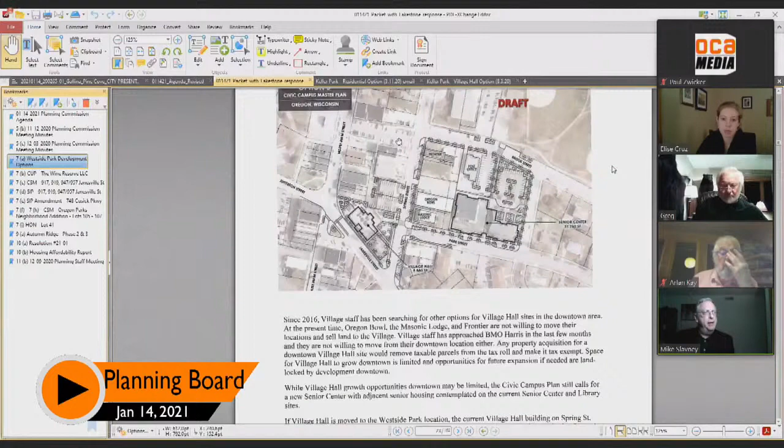Well, I can introduce this item. In the Plan Commission packet, which is page 24 of the PDF, Elise has provided our future land use map from the comprehensive plan.

This property, the northern two-thirds of it, is designated for park use. The southern third remains designated for institutional use because it reflects the potential use of that area for the school. As a reminder, depending on the outcome of this long process, we may need to amend the comprehensive plan's recommendation for this site, for example, to show it all as park as one alternative that we'll be talking about.

Jeff Maloney is the senior site designer for Vandewalle and Associates, and has laid out hundreds of sites around the country, focused here in southern Wisconsin. Jeff, I'll turn over the discussion of the alternatives to you.

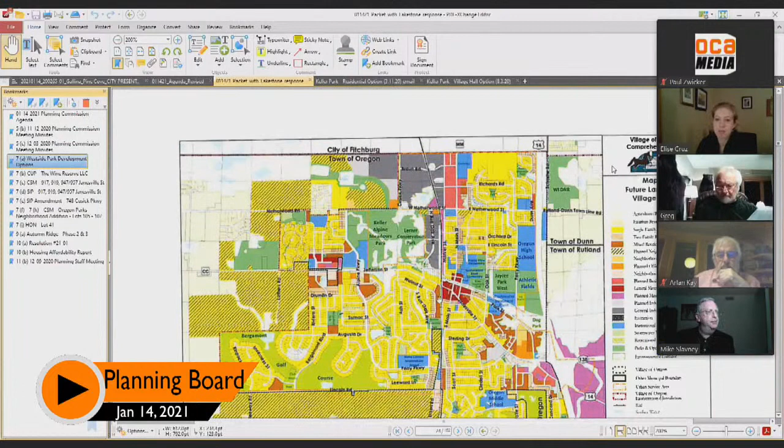Thanks, Mike and Elise. Hello, nice to see everyone. I guess there are little pictures in the bottom of my screen.

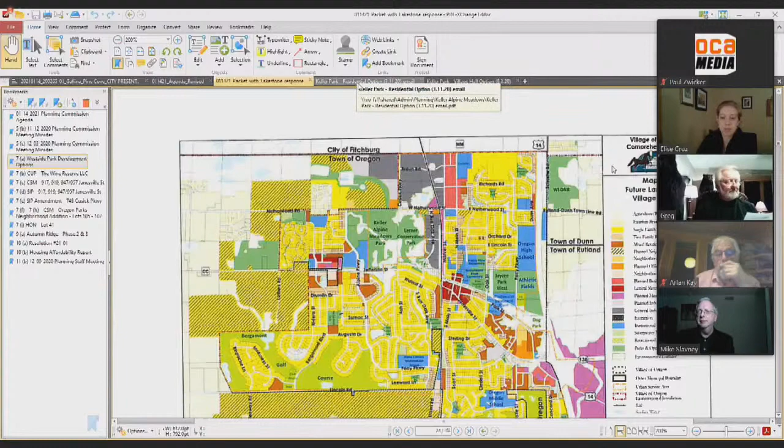We did prepare these two concepts back in March of 2020, right before everything shut down, so it's been a while since we did this. We worked with staff and rather quickly put these together to start the discussion and, as Elise mentioned, to just get people to think about what fits on the site.

They are pretty much interchangeable, so elements on there can be moved around, but it gives you a good idea what fits. In general, there's the east-west road, the existing road on the south. Where that enters the site into the parcel, we kept south of that as an opportunity for development, just like Mike was mentioning in the future land use map.

One alternative shows a village hall configuration, which we generally put some sizes to. The other shows some affordable housing or just housing in general. And the north shows some natural areas and some play fields. So this first option here, we can start with this one, Elise, that's fine.

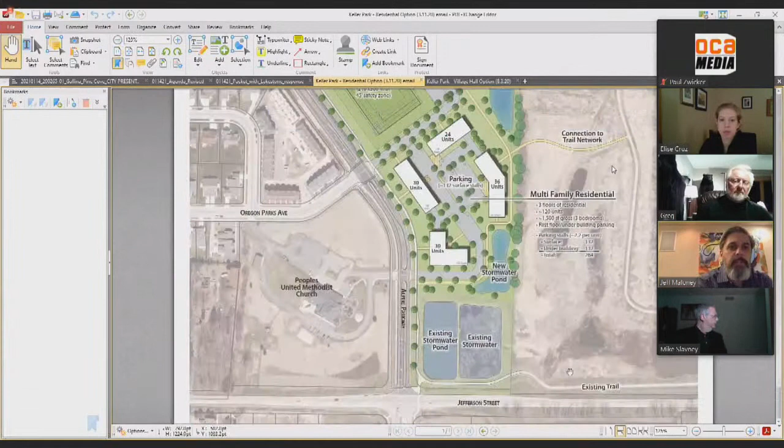If we zoom in on the south, we can see where that residential is. I'm sure you're all familiar with the area and the site itself, but as we walk through these concepts, just think about how the site generally falls from the west to the east. So we tried to use that existing topography as best we could in these concepts.

There's stormwater existing to the south, but we also added additional conceptual stormwater ponds along the south and the east to try to take any infiltration before it goes into more natural areas. So we want to respect the park, the natural area to the east.

So in this first concept, it just shows a multifamily layout. I think we have 120 units, so we didn't try to put very high density. We showed the setback from the street, similar to what's already built to the west.

Each building there you see is about 24 to 36 units. We used a gross square footage, if you're interested, of 1,500 square feet, which is a lot for a gross, but we wanted to accommodate 3 bedrooms or potential family housing. That's really what the direction we were given. So 120 units, you could fit more on there if we needed to, or less.

Stormwater pond to the south to collect the infiltration for that. There's plenty of parking in this concept for a 2-to-1 parking ratio, so 2 cars per unit over that.

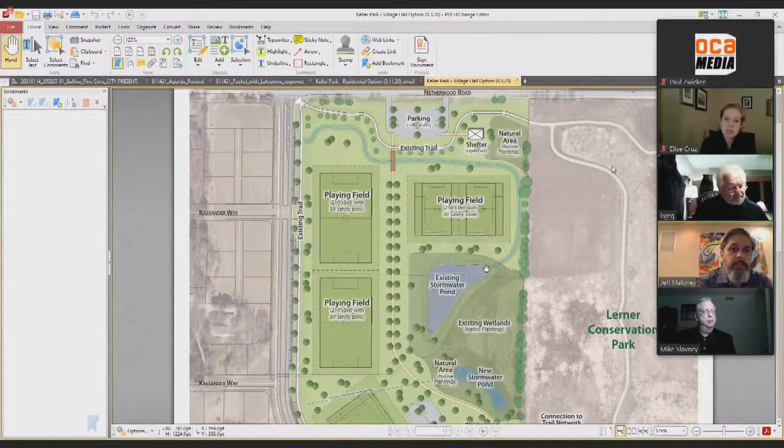That's existing, all that where the hand is, and then it is moved right there on the east side. We shifted it over a little bit to allow room for another play field if that's desired by the community. Otherwise, that wouldn't need the pipe that goes into the stormwater pond.

This option has a little bit more wetland area or natural area shown in concept. Obviously that shaded area could change depending on what you wanted for uses, but we had that path again designating more active space from the passive space. The play fields are essentially the same location, same size.

The parking lot on this option is a little smaller, though it could get bigger on the north side. And the playground, shelter, we showed a recreation area. Those are kind of sized for like tennis and pickleball and basketball to give you an idea what fits on the site.

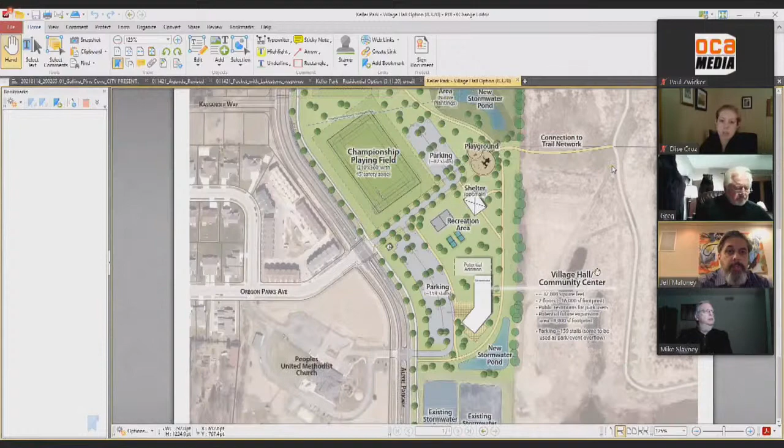And then the opportunity for the village hall, again we thought this could be a 2-story building, and typically we'd recommend putting buildings on the street, but with the natural area to the east and the sloping topography, we thought this could potentially be an exposed two-story structure. So it'd basically be one story looking east and 2 stories looking west.

This shows an 18,000 square foot footprint, so that's 37,000 square feet in total. And with an additional potential addition on the north side, 8,000 square feet shown in that rectangle, it could go larger.

We based that not on any needs assessment, but largely based on knowing that it could be a community center, could be different services besides just the village hall. So we wanted to make it larger.

And then also to give a real world example, Baraboo just redid their city hall a few years ago on the river. This is essentially the same size as that facility. Baraboo's is a little bit larger, it'd be the same size with the addition. And they have, I think, police and fire in that facility as well. So it's a large structure.

We thought there would be an opportunity, if this was a public building, to have public restrooms in here that people could use when they visit the park or the natural area.

And just to finish it off, there's shown about 140 parking stalls, so there's quite a few in that parking lot. And again, wanting to make sure we show areas for new stormwater infiltration before it goes east and before it goes south into the existing ponds.

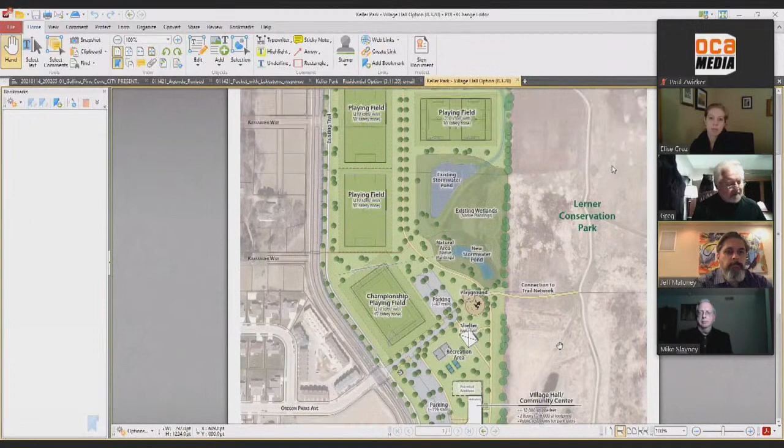Okay, thank you. Elise, do you want to say anything else, or Mike Slavney? Not at this time. All right, so Plan Commission members, anybody have any comments or questions?

Village Board, I got one. I'm sorry, go ahead, John.

You had mentioned that we'd gone through the Civic Campus study a few years ago and came up with sort of a wants and needs from the community, and wanted to sort of understand. We've got this study going on now, we had that study going on. Is there any work being done to sort of tie those things together? Because what we're talking about, or what we had talked about at the Civic Campus plan, was to sort of keep stuff downtown. And now the library has gone into a location that's not really downtown, it's a little bit off. And we've got a conceptual drawing that shows Village Hall even further away. Is there any thought as to sort of herd these cats a little bit and say, what do we want to do and how do we want to approach this thing? Is that making any sense?

Greg, can I address that? Certainly, absolutely. So John, we attempted over numerous years to try to find building sites for the senior center, the library, and the village hall downtown. We reached out to BMO Harris again, for like the second or third time, and we have just not been able to find the three sites for the buildings. And we just felt extending the village hall and that parking away, and some of the park away, and moving into a building that would be at capacity, we didn't think it made a lot of sense to put the village hall on Janesville Street. So we started looking for different sites, to be honest with you.

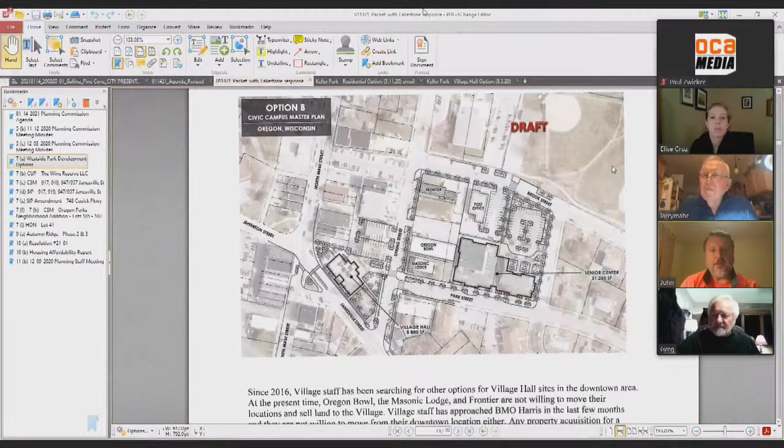Yes, my question is, was there a priority put on the senior center being downtown versus out here, coupling it with elderly housing versus moving Village Hall to that location? We're struggling with the library too. Is there any tie to keep it downtown in that location?

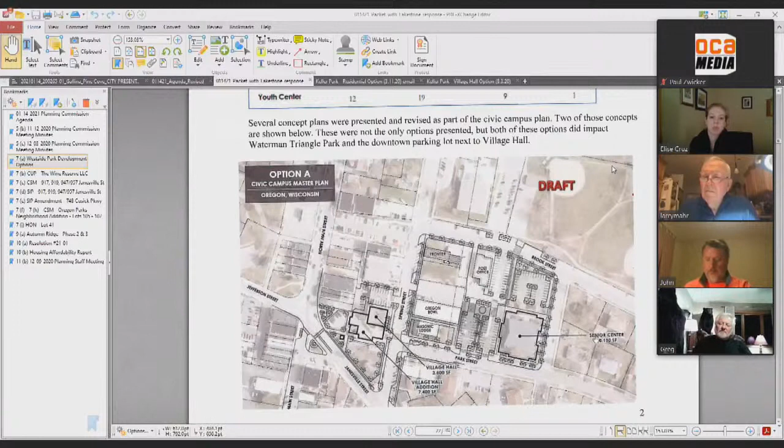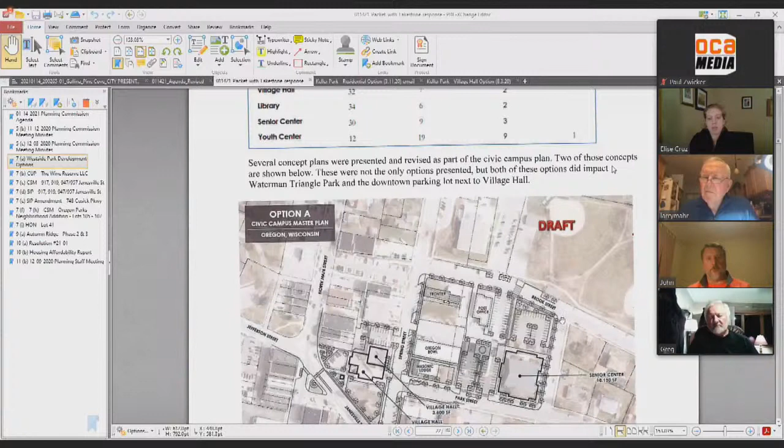That's a great question. When we were looking at the library site on North Main Street, we first thought that's where the senior center could go, since it would be a smaller building. But I've talked to Rachel, the senior center director, about this four, five, six times, and she feels strongly the senior center needs to remain on Park Street in its current location near this downtown senior housing. That's kind of why we're going with that approach. I'll say if COVID hadn't happened, we had intended to hire a consultant and architect in 2020 to look at that site, getting rid of the library and senior center building and putting up a new senior center. But Rachel feels pretty strongly that's where she wants the new senior center to go.

In the memo, you may have seen there was a Civic Campus Plan workshop done with 40 participants. I think it was largely downtown residents and business owners, maybe some board members as well. This is a little hard to read, but it does rank some of the facilities in terms of how people feel about things being downtown. This is also now four or five years old, so it would be interesting to see how opinions may have changed. The growth of the village has definitely been to the west, and that park is becoming a bit more of the geographic center of the village than it had been in the past.

Not to say it wouldn't be inconvenient for some people, but I agree with Mike. Also, we're trying to think about Village Hall as more than just Village Hall—maybe a community center with a room and kitchen that could be rented out for wedding receptions or high school graduation parties, allowing the village to expand as needed for staff. Realizing that other municipal buildings like the library and senior center will have a lot of community meeting space, the community room and boardroom in Village Hall that pre-COVID were used a lot by community groups—we'll still have some of those larger meeting areas downtown, regardless of where Village Hall ends up.

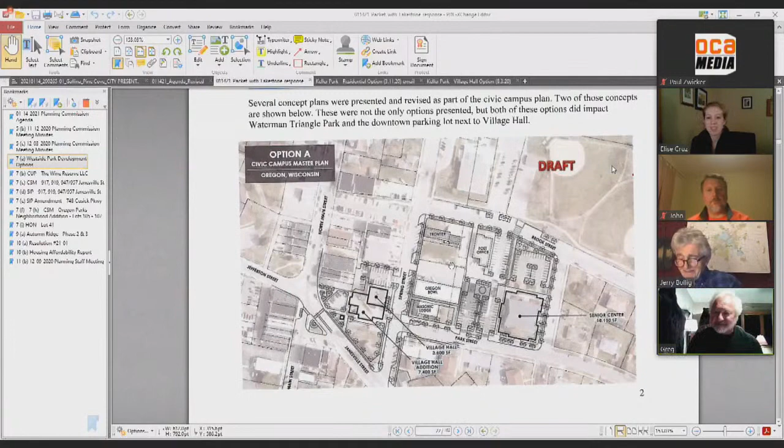Am I recognized? You are recognized, sir. Thank you, Chairman Snelly. During the overview, the consultant mentioned there's a place for the Village Hall comparable to the Baraboo Village Hall. How many square feet is that facility?

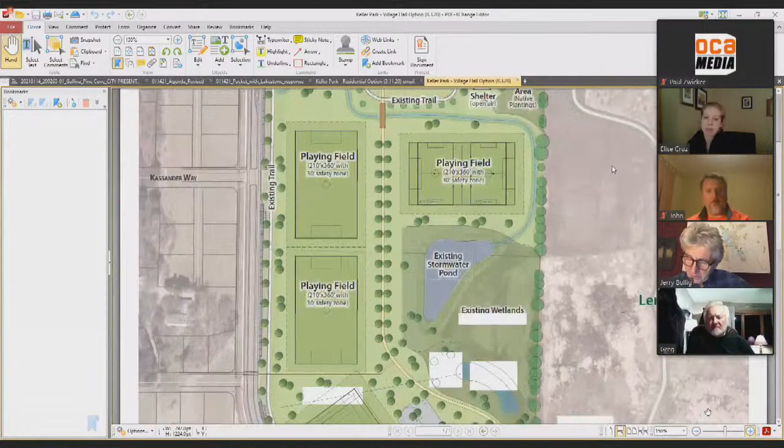The Baraboo is around 40 or so, at least in footprint. It's taller too, so that gives you an idea what fits on that.

Is there a possibility for restrooms on the north side of that lot, by the parking lot? Yes, there could be restrooms in that shelter or trailhead area. We have a porta potty located to the east and north, but if we're adding more recreational facilities, especially these playing fields, we need a modern, bigger restroom. Absolutely, Jerry, it's been on our plan all along that we'd need restrooms out at this site, possibly even one on the north and one on the south, depending on what's configured to the south.

And then how was the number of parking stalls determined?

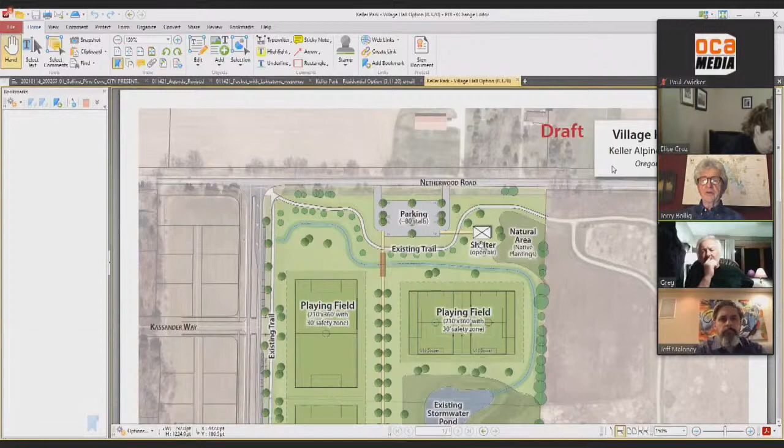We did have discussion with staff about parking, based on some events, and there's also parking along the street. We tried to break it up into two areas. I think we were trying to hit 200 for the park area plus street parking. And then for the village hall, we just fit what fit on the site.

So what population did you use on the field to determine 200 stalls? Trying to remember. We did have discussion at staff, but I can't remember how we got to that number.

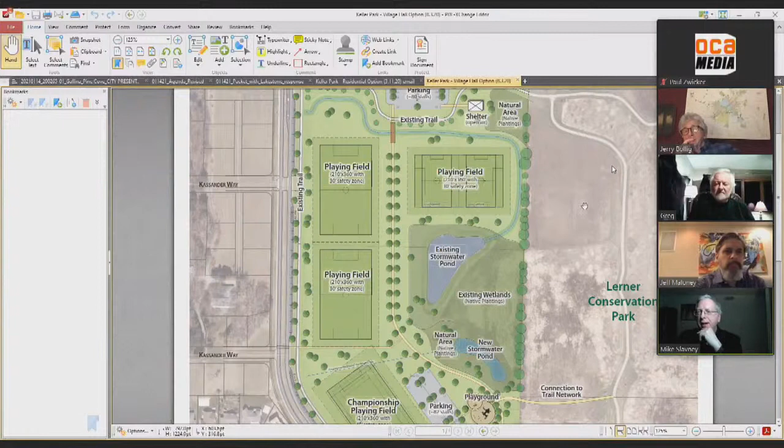Jeff, I think we felt that with players and relatives, hitting between 40 and 50 spaces per field would be more than adequate and would allow some of the unused spaces to be used for general park purposes. We've still got the conservation area and other park facilities in the area as well.

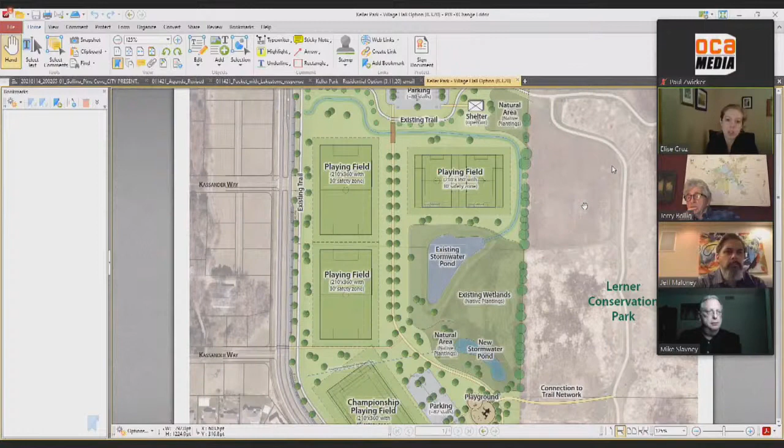Okay, thank you very much. I believe there's also overlap with games when they're back to back. You have two groups of people waiting — those currently using the field and those waiting to use it. So there is some overlap in how game days and tournaments work, and there'll also be spectators on nice summer nights. So those are my questions.

Thank you. Anybody else from Village Board? Ms. Nelson, you sent a letter to Mr. Rau. Did you want to have some discussion? Theresa? Yeah, thanks. Yep.

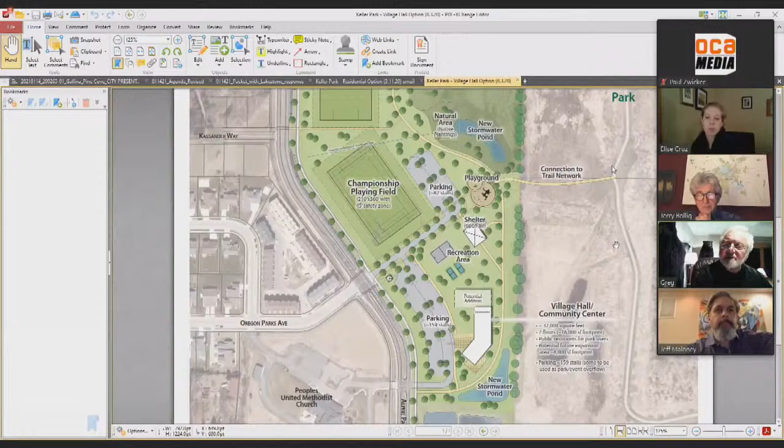I sent the letter to a number of board members and commission members, and I believe it's going to be part of the record for this meeting. So I don't want to rehash everything that's in the letter. I thought I would use this time tonight to keep it a little bit bigger picture.

I wanted to speak to you tonight to ask you to protect the Oregon Conservancy. Now, there is no Oregon Conservancy, but there should be. The areas of Keller Alpine Meadows Park, Lerner Conservation Park, Dega Memorial Park, DiMaggio Park, and the potential future Westside Park are a connected ecosystem of wetlands and uplands, whitetails and redtails, monarchs and moths. They deserve the recognition of the value they collectively provide our community.

Now, the village has many nice parks that provide spaces to play sports, play on a playground, or throw a Frisbee, but I think we have a really great opportunity here to foster something unique and special by choosing to restore instead of develop the Westside Park area. The village can make a commitment to environmental stewardship while reducing flooding, supporting pollinators, and preserving this natural retreat for park visitors. We have the opportunity to harness this potential, and it's just waiting for a coherent vision to transform this into a shining gem for our village.

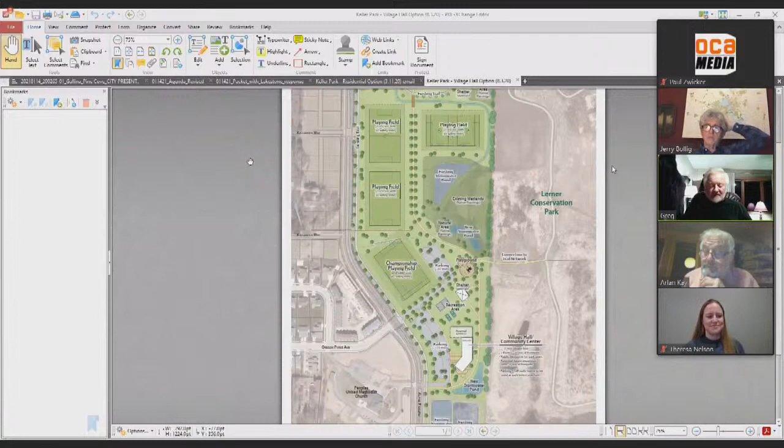Mr. Gracz, although you're a short timer, or Elise I guess, where does this thing going to go? We're going to look at this for the future. It's just something that's on the back burner, so to speak, or?

No, we noted on the agenda there's money in the 21 budget to hire a consultant to start continuing to work on this. And the new park board that the board just confirmed the other night will have their first meeting in March. So I would anticipate the new park board diving into this sometime in 21 with the consultant.

Okay, there's a lot I could say about how this park was formed after the 1999 flood, but I think that's left for a future meeting. As this proceeds along, there'll be plenty of public meetings, announcements, and you can look at the website for the village. All right, thank you very much, everybody, for participating.

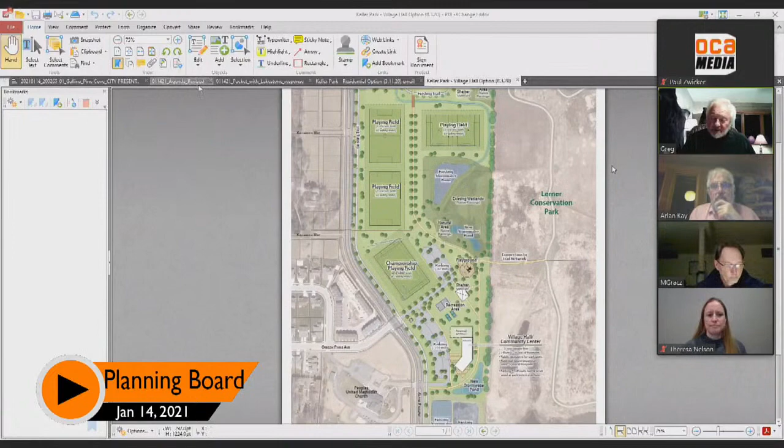Village board, are you going to leave us at this time? Or do you want to stay with us? I guess I have one more question if I could before you move on, Greg. I apologize.

Are you looking to get an expectation of a direction from the board and the plan commission on one of these two options, or is this just an informational thing? Just informational thing at this point. Thank you. Sure, John.

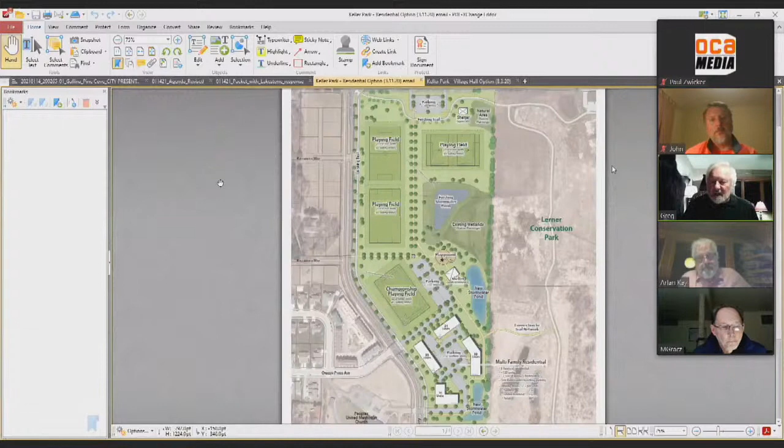All right, any other questions? Any comments from anybody? Mr. Chairman, if village board members stay, do we get the planning pay for the evening? Yes, you do. Okay, great, thank you. Thank you, Chair Schnelly. You're welcome, Trustee.

Well, okay, Jeannie, do you want to adjourn the meeting for the village board or not? Sure, Mike, is that appropriate? When we first prepared the agenda, we didn't have it on there. Then I realized I'm not sure the entire board wants to stay for the whole meeting. So you can certainly adjourn, and then board members can leave. Sure, yep, let's do that. We won't blame you.

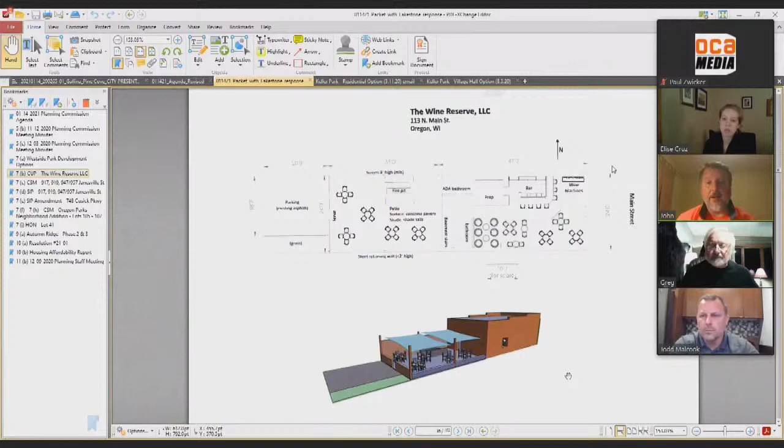I got a couple of questions. I think that this is a nice project, a nice use for the space, and I'm hopeful that you're successful. It's outside of our purview, but you might want to make sure that you are okay with your capacity for bathrooms with the number of people you're going to have in here. Based on what I'm looking at, it looks like you might be light, especially for ADA bathrooms. So just to let you know.

And the other thing is, the railing itself, what are you planning for the railing on the outdoor area in the back patio?

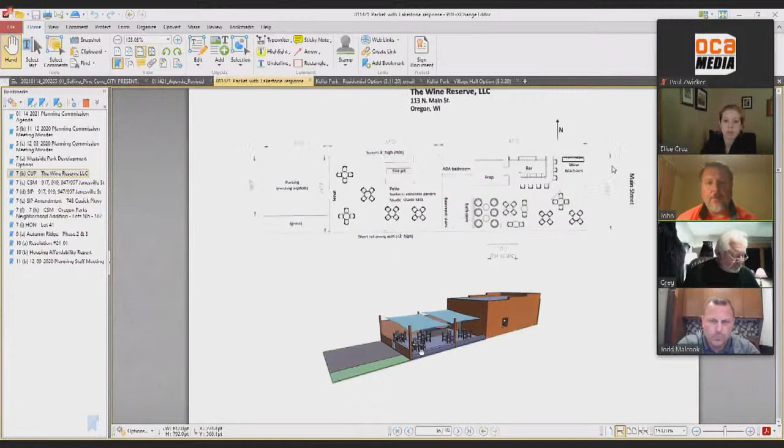We've actually been working with a landscape designer on what that's going to look like. Where the cursor is right now, there's actually a berm coming from the adjacent property, and so we're thinking that area would be like just a knee wall, retaining wall, that would hold the dirt and soil on the south, and then just a wall maybe at seat height along that side. Towards the back, we continue it around and have a gate in the center. On the north side, that's intended to be a privacy fence, because that's the side where we have the residents over there, so that was an accommodation for them.

So we'll need to make sure that you're going to be serving alcohol out there. Elise, is there any restrictions or requirements for a fence height or anything like that for serving of alcohol in an outdoor area?

Mike Slavney, I know we talked about this last week. There is a screening requirement. It's not necessarily about alcohol, but just about outdoor commercial entertainment in general. I believe Mike Slavney felt that the walls proposed were enough to contain the use, and the applicants are going to be at the village board meeting on Monday for their liquor license. So this will all be reviewed and hopefully approved as part of their premises description too.

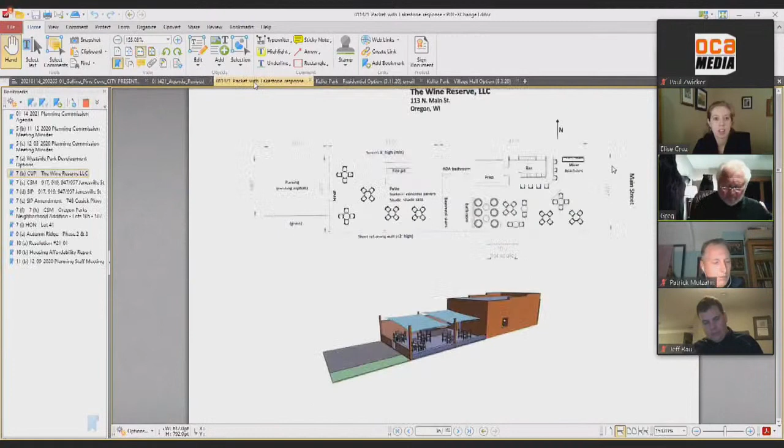All right, so this item is obviously closely tied to 7D, the SIP for Lakestone, but just as a separate approval. This CSM we've been anticipating. The property is currently made up of 3 different parcels, and the CSM proposes to rearrange them into 2 different parcels.

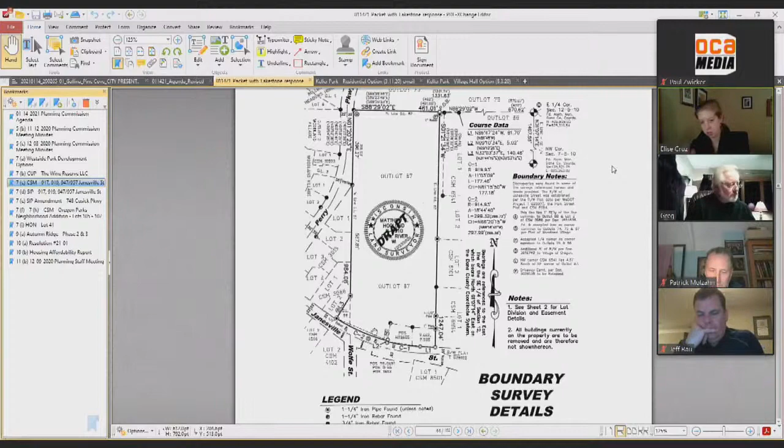As we've discussed before, the main access point for this site is going to be right at Wolfe Street and Janesville Street. That will be a four-way intersection. Obviously there's already stoplights there, so the stoplight in the south-facing direction will be added for people exiting the site for both the commercial and the residential use. The site will also have some cross easements that we're working on, and the applicant is working on, so that there's shared access to both the commercial site, whatever that may end up being developed as, and the residential site.

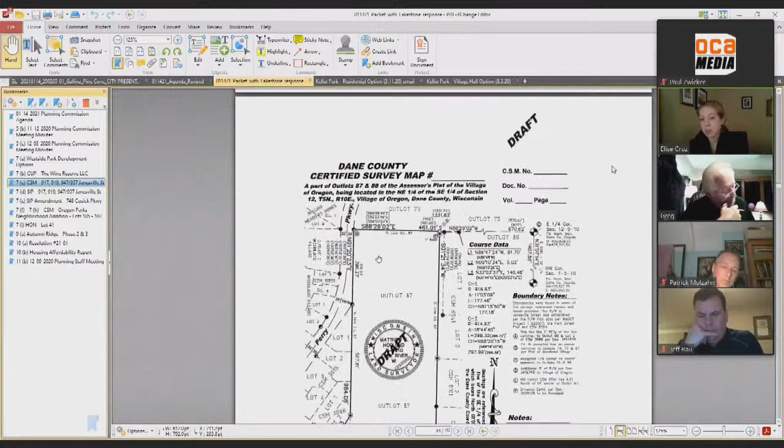There is an access point, if you may remember, off to Perry Parkway through the multifamily site. We do have a couple of comments from our village engineer that are still outstanding, pretty minor. So I want to make sure that before the final version is recorded at the county, we do get a final approval letter from our village engineer, and then we do receive those cross easements to ensure access to both lots. Obviously this will be tied to the SIP, so there's a condition of approval for the SIP that the CSM be approved, but this can certainly be done ahead of time. So that's kind of where the CSM stands.

I don't know if Jeff had any other comments or concerns that I didn't capture. I think that sums it up really well. All right, Jeff, Mr. Rau, do you have any? I'll start off first.

In the past there are a number of general comments from our village engineer, and they're... I shouldn't say minor, they're as a contractor, they're picky. Right, but we pay them to be picky. I understand that, so a retired contractor.

Are these substantial enough that there's any reason why we could not proceed with a certified survey map? No, there's nothing here that's overly concerning at all. And I think it's just cleanup stuff.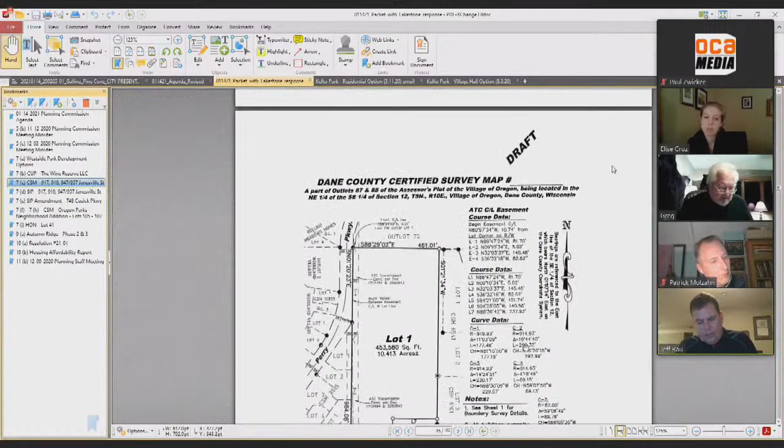So this CSM does a nice job. Keep in mind, there's several lots down on the southeast corner there that are kind of remnant homes and multifamily or a fourplex and that type of stuff, and this is going to clean that all up.

Plan Commission, anybody have any concerns? Any discussion, comments? None? Okay, then we need a motion to recommend the village board approve a certified survey map for 917, 919, 947, 957 Janesville Street, Lakestone Properties, with the recommendations forwarded by our village planning and zoning administrator.

So moved, Pino. Second, Mahr. Any discussion? All in favor say aye. Aye. Opposed? Motion carries. Thank you.

When do we, Elise, have any idea when we'd have that cleaned up? I guess that has to come with the applicant, they'll tell you. Right, likely in the next couple of weeks, and then I imagine we'd probably have the final version in front of the village board, hopefully in February. Let's see, we should shoot to have it cleaned up for that. All right, no problem, good, thank you.

Just a quick question. Okay, we'll move on to item 7D, which is discussion and possible recommendation of the village board, the SIP plan for the same property at Janesville Street from Lakestone Properties, affordable multifamily housing project.

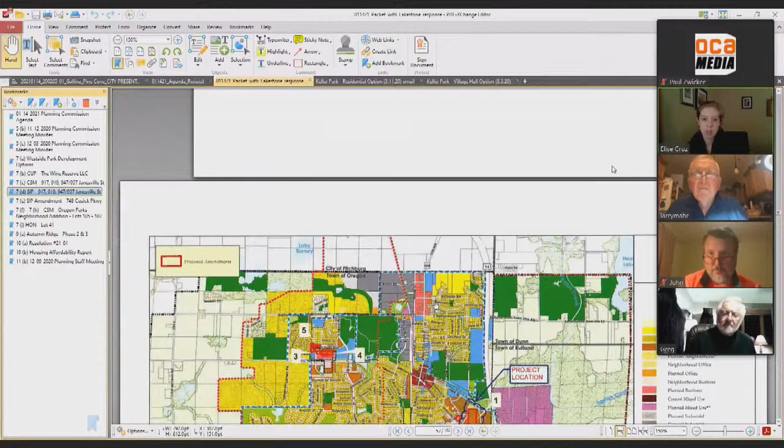This is just an overview - there are a couple pages of comments from the village engineer. Again, lots of small detail, picky type comments, but good catches by the village engineer. So I'll go ahead and scroll to the main map, but that concludes my comments.

Jeff Rau, do you have any comments at all? No, they're about where they need to be.

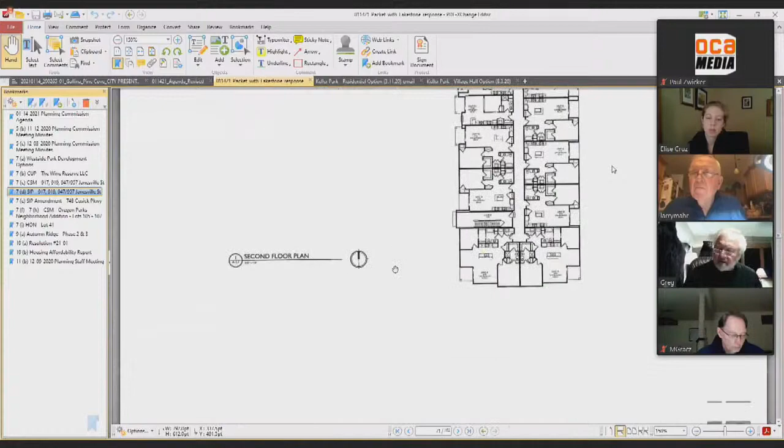Obviously we will still have final plan review when they complete all of the utilities and everything like that. We still have the easements to look at, to make sure the utilities are put in easements and everything exists with that. Most of the stuff is just making sure they comply with our standard details and standards for roadway connections and sidewalk connections and that type of thing.

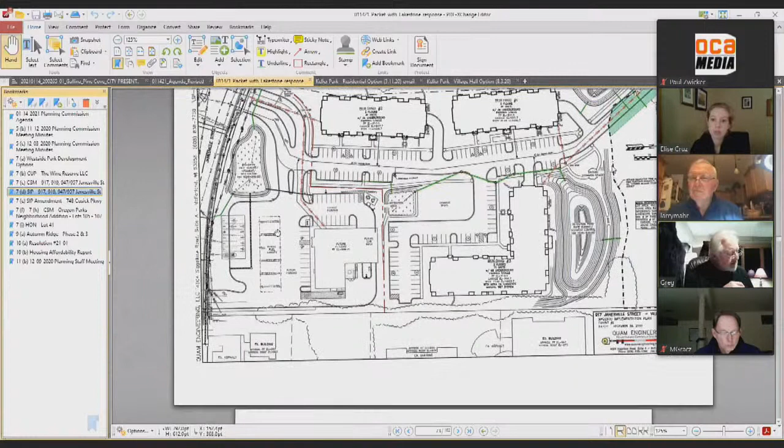I was going to maybe wait until later, until everybody finished discussing, as long as we're at this point - we've got sheets C2 through C4. There's a number of questions and clarifications they're asking for the village engineer.

Which one, Greg? I'm sorry, sheets. If you look on the second page, they've got drawing numbers C-2 through C-4. There's quite a list - right, yeah, which I think is kind of a lot, the best way to put it.

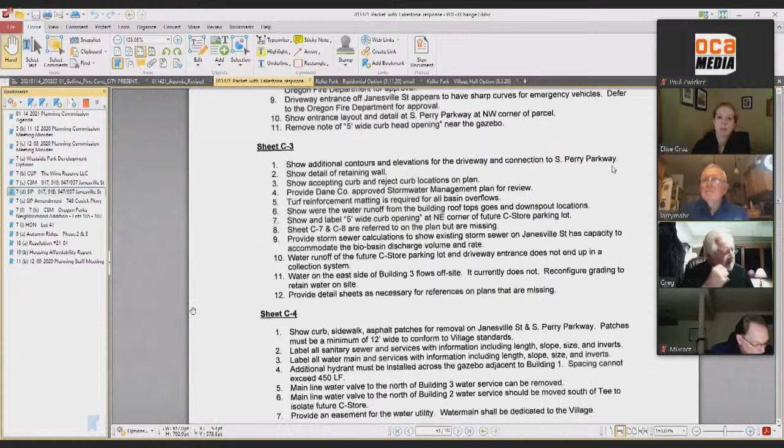It seems that we like to see sometimes fewer clarifications - excuse me, we like to see this kind of cleaned up. And I understand because of the timing, I get where we are with it right now. I'm not sure how much of a hurry the applicant is in, but under a specific implementation plan, I'd be looking at the comments here. Let's just pull out a few of these.

Show where existing traffic lights are to be relocated - they're still working on that final design. I would not expect that in an SIP.

Yellow truncated domes, those are a requirement. The radii in the drive lane should be a minimum of 26 feet for emergency vehicles. That's standard stuff that's going to come out and be required as part of a design anyways. This is always that tough thing - we ask our engineers to be very, very detailed.

And so they develop a list like this that looks like it's not ready. But a lot of these are very minor items that I'm happy they are picking up, because these are things that our engineers will make sure and go through in the final design that they accommodate, but they don't change the overall character or layout or implementation plan, if that's what we're using here, of the development.

I would also note that some of their comments are focused on that convenience store that's sort of sketched out as a conceptual, and just to remind the planning commission and those on the call, that's just sort of there as a placeholder. The applicants don't have a user for that site right now, but that was one potential development. They wanted to see how traffic would flow, how it might fit. So any comments about the parking lot, driveway entrance, that would all be reviewed with maybe a conditional use permit, but definitely a site plan when there's a specific user in place for that site. I think at this point, those houses would remain until there's a user for that commercial site.

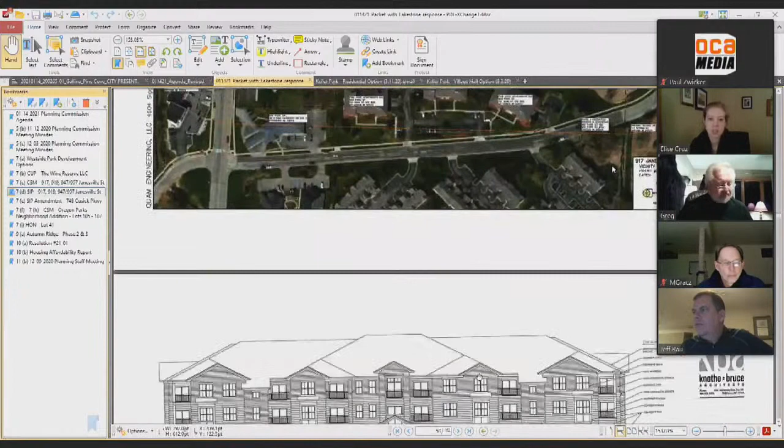Yeah, I think I agree with Elise and Jeff. There's a lot of these things on here. We met with our team to review the letter, and we can get our plans updated pretty quickly on that and turned around, probably within the next week or two. So nothing in there really surprised us or gave us concern. It's just a matter of getting the details finalized and finishing things up. Whether it's an approval with condition, I know we're going to review or listen to some other comments, and I can respond to those as well after. So we can follow up after that if you like.

Okay, Mr. Gallina, are you online? I am. All right. I suspect you want to have some comments. There might be somebody else in the audience, but you can go ahead with your comments, sir. All right. Thank you, Greg.

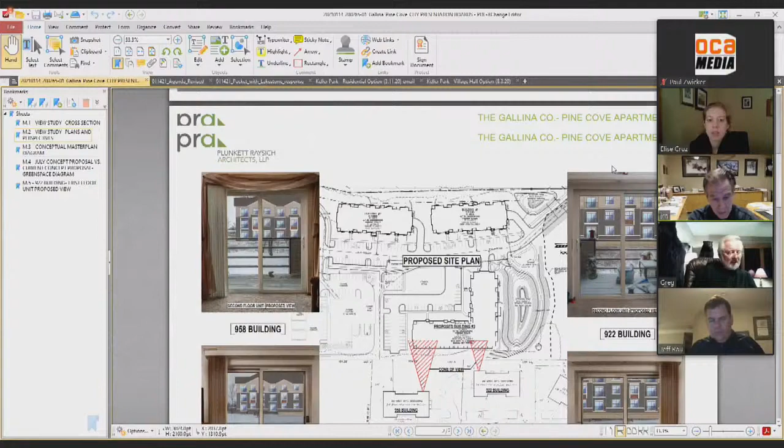Good evening. My name is Joe Gallina, and I'm the CEO and the owner of the Gallina Companies. I'm also the owner of Pine Cove Apartments. We're very thankful to have the opportunity to come before you tonight regarding Lakestone Properties SIP. Just a little background on the Gallina Companies: we specialize in developing and operating apartment communities. Over the last 40 years, we've constructed and operated over 3,400 apartments. Our apartment communities range in size from 75 units to 340 units, located in Wisconsin, Illinois, and Florida. In 1990, we developed Pine Cove Apartments, which is located immediately to the east of the Lakestone Properties parcel. We still own and operate Pine Cove Apartments today.

We carefully put our concerns in writing regarding the SIP that is before you tonight, which has a lot of information. Tonight, we primarily want to focus on the location of the Lakestone Properties Building Number 3, and what we believe is the negative impact it will have on both the Lakestone and the Pine Cove apartment communities. We're happy to answer any questions regarding our analysis of the SIP. At this time, I'll turn our presentation over to Kurt Keller of Plunkett Raysich Architects.

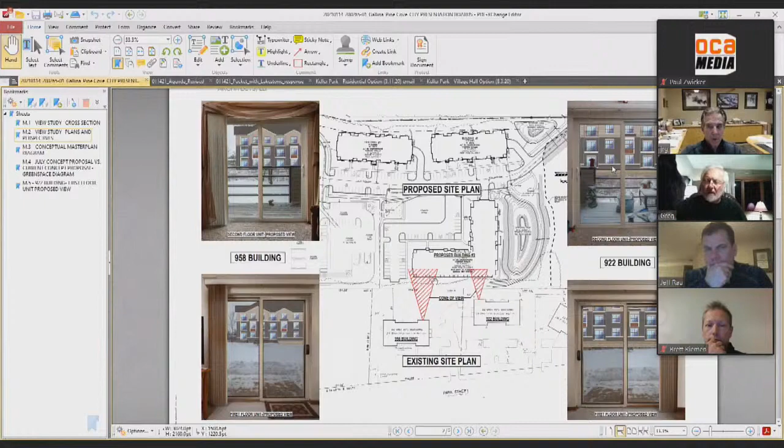An idea for your consideration, something that tries to balance the design, not trying to take over what is the requirement of the development team's architects and planners, but pointing out that there might be some different solutions here that could be looked at.

One is pulling back some size of building number 3. The distance we show between the 922 building and what's called building number 3 is about 84, 85 feet. So if you remember that last picture looking out of the 958, it's getting to be a reasonable distance, and you're not looking at the long facade of the building from neighbor to neighbor in that 60-foot range. You also have the potential here of a reference back to the International Fire Code, that there's potential for good circulation in a parking lot.

We're going to be talking in a minute about a green space, specifically play areas and things like that, and the continuity of green space and some changes that have occurred that affect it. This allows not only that there is a building separation, but there's also a green space separation that is usable green space.

This is a development that everything I'm looking at, it looks like it is meant for families. And there's still, even though the convenience store, gas station, and car wash are to the left, this design looks pretty well developed, because there's a very strong circulation and understanding of everything down to where the trash cans are going in the service aisles. It looks very developed and understood of what the intent is to be there.

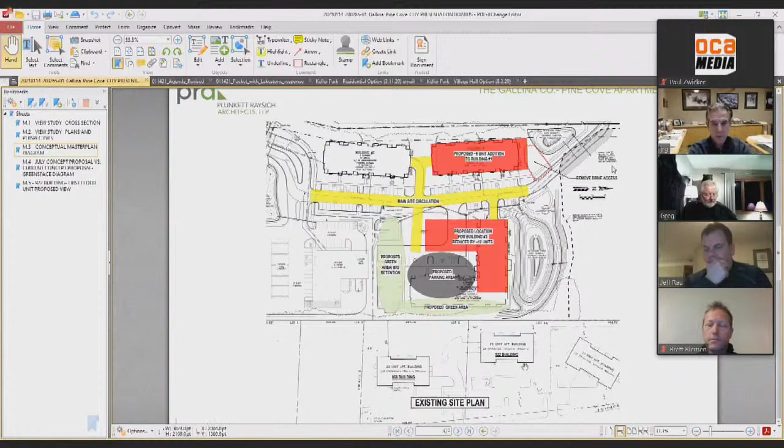Ms. Cruz, did you receive the later drawings that Mr. Gallina forwarded this afternoon? Yes, please, and thank you. I'm going to finish up here and turn back to Mr. Gallina, surrender the rest of the time to him. But I wanted to put up here, this was the image on the left, and we tried to get these fairly close to scale. They're not exact.

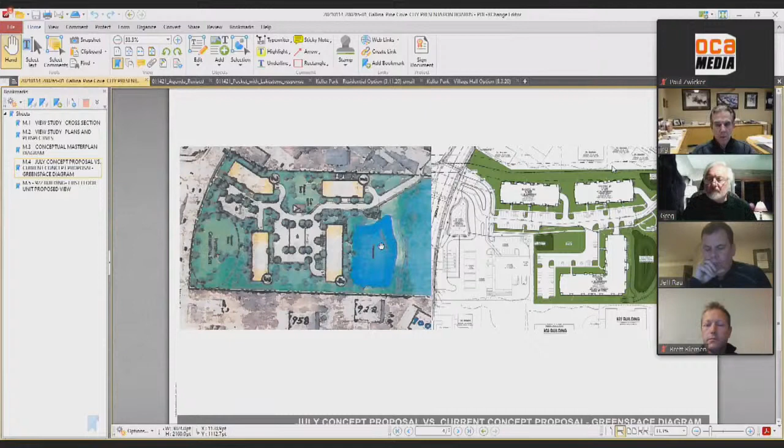So we also want to show just how the green space—we colored in some green space to how we understood it, and the darker green is meant to show the major areas of detention, the steeper parts of the slope. There are rock retaining walls and things that make it a bit of a challenge to walk around some of the buildings.

But you see that there's not a contiguous green space. There's an island in the middle, and it's really the only play area in the development. Children have to cross parking lots or roads—there's no other way to really access that area. It's a challenge, and it's very different from the design on the right. So with that green space discussion, I'm going to turn it back to Mr. Gallina and ask him for any final comments, and I'll certainly be available for any questions. Thank you very much.

Thanks, Kirk. I guess my comment is I've been developing and operating apartments for 40 years. We've probably developed over 45 different apartment communities, and our communities have been very successful for all the reasons Kirk just walked you through on the original concept. It gives you a reason to have longevity with the tenants that live there—the additional open space, the open green space, the usable green space.

I believe the July design had a clubhouse, an amenity center, a gazebo over potentially a pond, ample parking, a very comfortable area to walk through the community. You know, people move out of communities over time because they get tired of things. They get tired of fighting traffic, tired of trying to find a place to park, tired of not having privacy. As I said, we've developed many, many communities, and the concept plan in the July Observer, to me, would be a very, very successful apartment community, in my opinion.

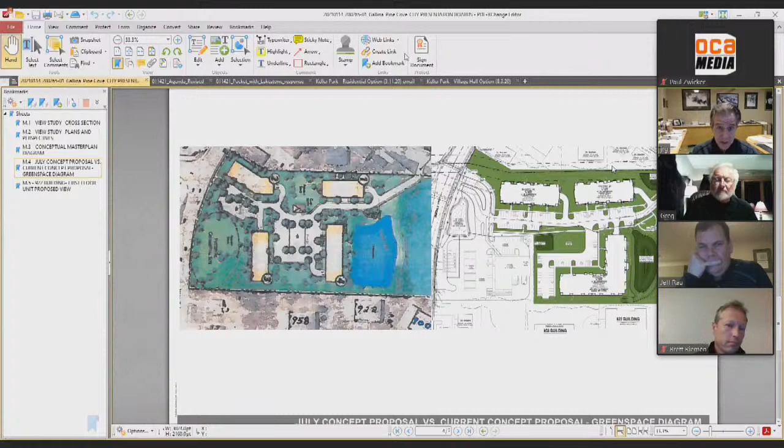It's going to create light pollution. You'll have shade during the day. And I just asked every board member, could you imagine this structure built in your backyard? Would this create privacy issues for you? And would you be comfortable living in your house with that in your backyard?

As Kurt mentioned earlier, this is a suburban location. Our customers at Pine Cove live at Pine Cove because it's a suburban location, not an urban location. And we believe the 60 feet is just way too close for this use. As I've mentioned in all my letters, we support the project. We just think the location of building 3 would not help both communities. And if it could be relocated, it would be a big improvement.

Thank you for hearing us. Thank you. Okay.

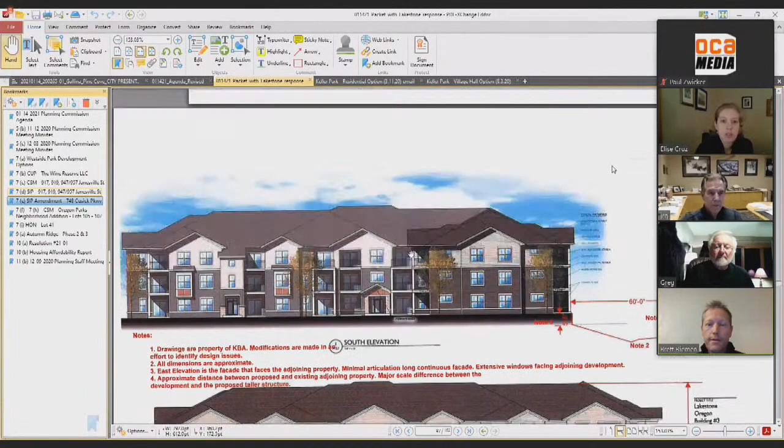Applicant, you have some comments back, don't you? Yeah, that'd be great. We appreciate the comments from Mr. Gallina and Mr. Keller on this. Obviously they've both been doing this for a long time, so we want to take that feedback in strong consideration. But there are also a lot of concerns we have with what they just said. I don't know if you want to go to the plan that they put together first.

Their alternative site plan. Yeah, that'd be good. Just the one they were working on. We'll get back to that here. The latest ones? Yeah, that one's good.

So we met with our team the other day once we saw this and wanted to provide some feedback. I'll get to the building 4 versus 3 issue, but we had lots of discussion with the Plan Commission and the Village Board about why the initial 4-building plan that was put together did not work. There were a number of reasons for that. I'd rather not go into that again.

So the changes they showed, flipping building 3 the way they did, causes some challenges on this development. I believe it isolates this building from the rest of the development. The way we had it, they're all opened up to each other, with the green space in the middle. Mr. Keller pointed out the green space was in a good spot. I think it's in a great spot in the center of the development.

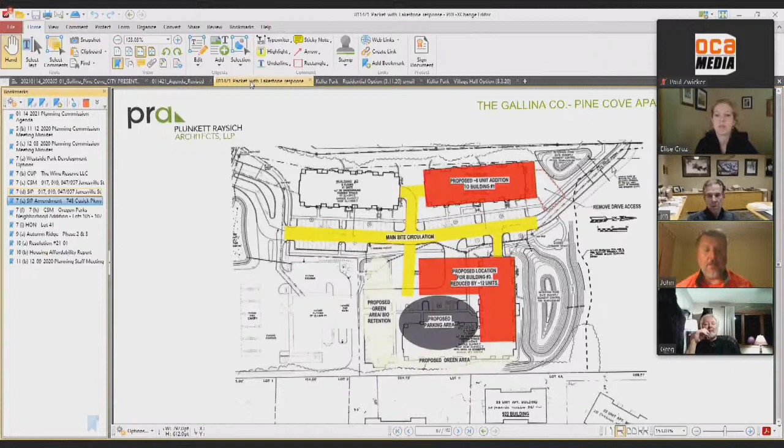As far as the concerns of Mr. Gallina and his architect, it seems the fire department access and those items are outside of what we typically look at. We leave that up to the fire department itself and the building inspection department. So while I appreciate their work, the building inspection and fire department have the ultimate call and can make flexibilities with that.

As far as the proximity to the other buildings, I just checked, and granted this is a small scale thing, but the Gallina companies' Pine Cove project has 2 buildings within almost 60 feet of each other. If you look at the corner of the close building to building 3, there's a building just to the right, and the corner of that building to this building is close to 60 feet itself.

And I wasn't too concerned about the proximity. I get worried when buildings are less than 10 feet apart, because in architecture terms that's sort of the magic number for opening requirements. So you're far enough distance away from the property line to give a suburban feel and provide enough openings and balconies for this apartment building.

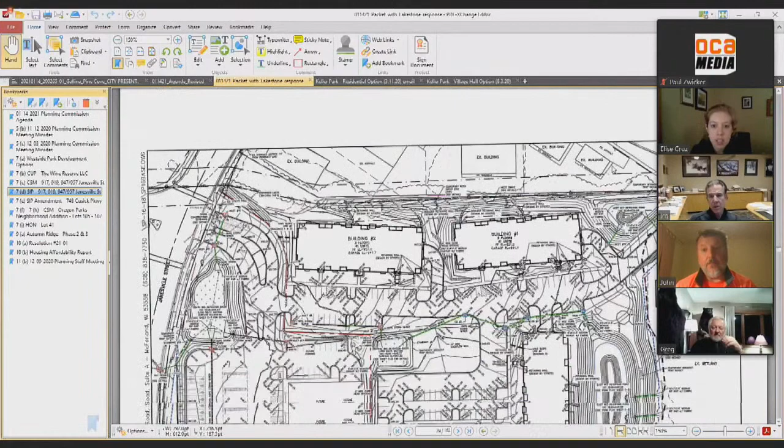Subjectively, if it's a concern, there are still about 30 feet on the Pine Cone lot for some landscaping to be installed. I'm sure we could ask Lakestone if they'd be interested in doing some additional landscaping on that side as well, to soften some of those walls. Looking at the landscaping plan, I think there's a couple of trees over there but there wasn't a whole lot, so maybe some of the trees along the drive aisle that goes through the property could be repositioned to help with that.

I am not comfortable with the gas station itself, and I know that it's not part of this development, so I am just washing that off. We've talked a couple of times about why the drive aisles can't be joined between 1 and 2, and it is what it is. That site falls off pretty hard on that side.

There's some good information in the presentation that was made. A lot of it, in my opinion, is just subjective. So I think we have a good quality project here, and is it perfect? No, but it is a good project and it meets a need that the village has, and I am in support of it.

Okay, thank you. Anybody else in Plan Commission? Can we respond to a comment? Am I able to respond to a comment? Absolutely.

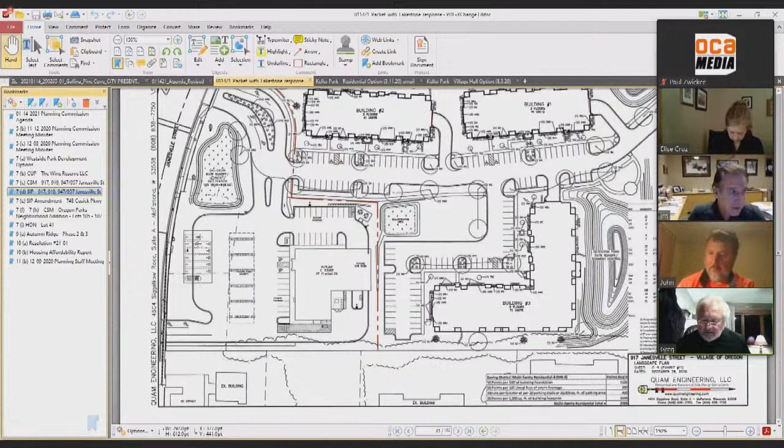I guess, I don't know John's last name, Mr. Bino, John Bino, the board member. When you look at our 922 building to the building to the north, you're looking at the end of the building, not the side of the building, so you're not looking at this big wide mass of a building, you're only looking at the end. And I think that makes a big difference when you look at 60 feet. In your opinion that is fair. If you turn building 3 so we're only looking at the end, that would work for us.

Mr. Gallina, could I please add on to your commentary? Sure, thank you. This is Kirk Keller again. If you could, Ms. Cruz, go back to the sketch idea that we put together, the one with the... thank you, that one.

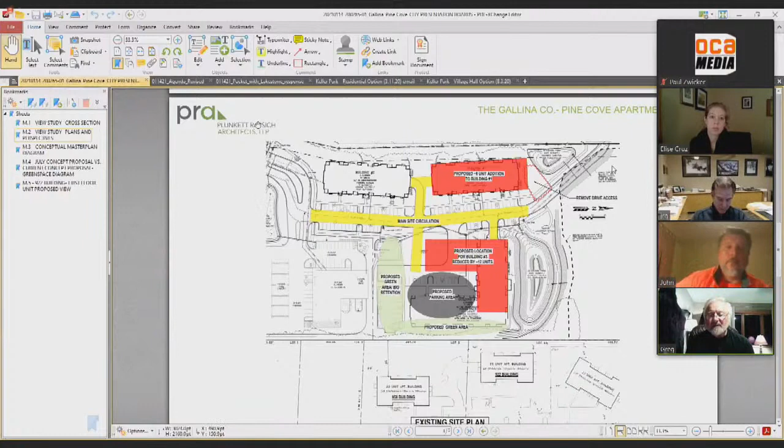Brett, do you have any other comments about it? No, I continue to think that, I appreciate their comments. I think moving it 10 feet, I'm fine with, of course, I'm fine with the 60 feet. I think the 60 feet is enough. I think it doesn't affect a lot of the building, but again, that's me, I haven't owned the building for 20 years. I understand that they don't want anything built there really. But even turning the building, then you'd be looking at a parking lot with a bunch of parking lights. So I don't know, it's not perfect, but I think this plan works well. If they want to take us up on the 10 feet, we're happy to do it. We lose some parking, but I think it's a very good faith effort to try to work this out.

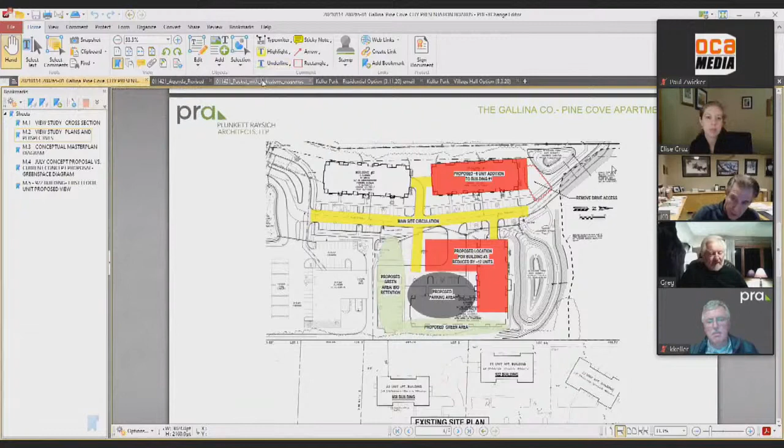Okay, so we've had both property owners discuss this. Anybody on plan commission, anybody else? Pat, do you have any comments? Larry? I do, but I saw Mike Slavney raising his hand, so... Oh, how did you see him raise his hand? Okay, Mike, did you want to make a comment, Mr. Slavney? I do.

I agree with Mr. Gallina and with Lakestone's comments. I think they're both right. To me, what was striking about the photos taken from the existing apartments was the lack of landscaping. And of course, there's no need to really landscape a vacant site. One thing that I think could be a very positive outcome, maybe the most positive outcome of sliding the building west 10 feet, is that it could provide a level platform for planting evergreens that'll grow big - hemlock, white pine, things with real mass and height to them. It's a long-term investment, but I think that would make a big difference. Having that extra 10 feet would allow some sort of interruption in the slope along the east side of building 3, at some point in that setback, to provide for a wider, flatter area so trees of that size could really get established over the long run. I just planted a couple hemlock in my yard, and I've got an existing one that's 60 years old, and a white pine that's 60 years old that was planted - they're park specimen trees. So I've seen what time can do, and within 3 or 4 years, they start really taking off vertically. So the best recommendation I could offer is getting more large-scale evergreen along the common lot line, at some point where it could be made flatter, and invest $4,000 or $5,000 in good quality trees and load up that area between the two buildings.

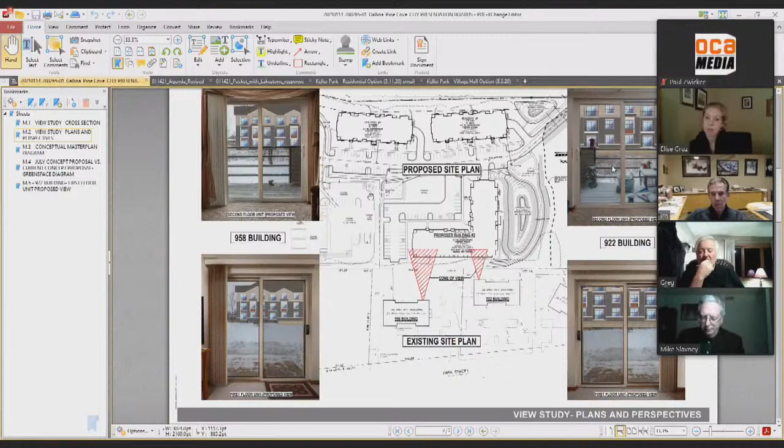Okay Brett, you have any comments to that? We'd be open to looking at that for sure. We can talk to our landscape architect - I have not looked at that backside. It sounds like you guys did a little bit more, and there wasn't much back there, at least. No, so we can certainly look at that and add some larger evergreens.

I've been there - not right now, but in the additional plans. Oh okay, I see, right now I think there's just maybe four trees and some bushes back there. So yeah, we can certainly add some more. I think that's a good idea. I think otherwise we're sitting at somewhat of an impasse.

And Mike, thank you for your comments - that would probably be helpful. I don't know how Mr. Gallina feels about this, but we are in a situation where these guys have addressed our concerns and met our requirements. I guess my comment is I attempted to bring this before the Plan Commission and the board during the GDP process, wrote a couple letters. I was told that my concerns should only come up in the SIP process. That's why I'm here tonight.

I would have been here earlier if I could have. I don't want to suggest the village didn't let me speak, but I was directed only to talk and present my concerns through the SIP process. But I did notify the village of my concerns. The landscape, moving the building, adding the trees will definitely help the first floor - more screening will help. I'm not sure what it does to the second and third floor of building 3 as far as visually towering over Pine Cove.

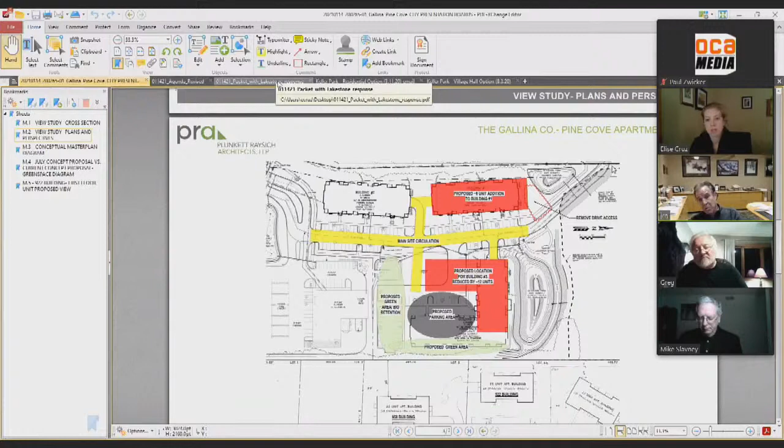I still feel that the initial design in July is better, and I think the design we proposed would be better. I appreciate the comments, but that's just our position, I guess. All right, thank you. Thank you.

All right, Plan Commission, any more comment? We've got to get to a point here where we have to decide, gentlemen and ladies. Greg, I didn't know if there was anyone else from the public that wanted to speak to that - I know it's not a public hearing, but I opened it up. If there's anybody else - I know Mr. Gleeman was there, and I asked if there's anybody else out there in the public. We did get a letter, did we not? Yes.

Right, from Claris, Miss Dewey. Is Miss Dewey on the line? If she is, I apologize, but no - everybody, I think she is, I'm not sure if she wanted to speak. I'd be happy to reach out to her if she wants to reach out to me directly. I do have answers to all of her questions, so unless you want me to go through that now, we can do that too.

I don't think we need to know whether or not gas, electricity, and water will be included in the rent - that has nothing to do with what we're talking about here. So maybe at least we can just put us together, exchange contact information, and then I can answer those questions to her personally, I think she'd appreciate that. Yes, sure. I know she's also on our council for the aging in the community, so I assume she's likely passing some of that information back to the senior center and some of their networks too. Good.

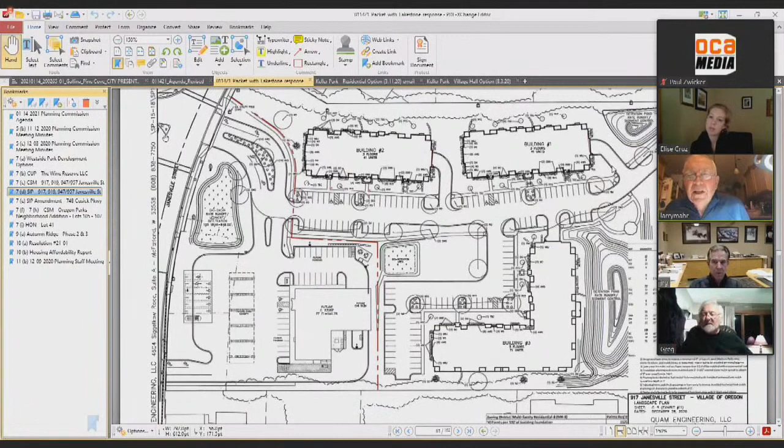Okay, Plan Commission, anybody else? Anybody else want any comments? Plan Commission members, anybody else have any comments? This is Larry here - I go along with what Mike Slavney suggested. I think we're working in a tight space there, and I'm glad that we're having this space developed. It's been in need of being developed for some time, and getting it worked out in a tight area with a lot of traffic coming from all kinds of directions here. So I'd be willing to say that we need a little compromising, and I think that's what Mike's suggestion does.

Okay. I agree with Larry, and I thank Mike for successfully articulating exactly what I was thinking about the landscaping, and then the applicant's willingness to move that building. It's not ideal, but I think it's a reasonable solution to this site. And as Larry said, it's nice to see this property developed.

We've been talking about this property since I've been on the Plan Commission. It's over 30 years ago. Oh, that's a long time. No kidding.

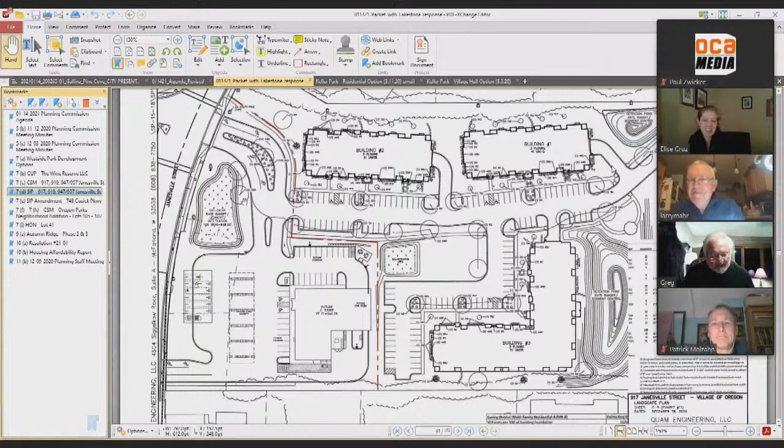Greg, are you for a motion? I think we are prepared for motion. Yes, all right. I would make a motion to recommend to the village board that we approve the specific implementation plan for 917, 919, 947, 957 Janesville Street, the Lakestone Properties Affordable Multi-Family Housing Project.

Which essentially is the moving of the property line, the building, right? And the landscaping, all the plantings, et cetera. Yes, landscaping. All right, that just clarifies.

Okay, we have a motion. Do we have a second? Second by Bano. We have a second. Okay, is there any discussion?

Now, we will be looking at site approval and other items yet in the future, correct? This functions as the site plan approval for planned development. But staff would be reviewing, if you're approving of this with these conditions of approval, bike parking, lighting, changes to the landscaping plan. We can certainly bring those back to just share with you to keep you informed as the development continues. But this would be the final approval beyond building permits.

All right, so we have a motion and we have a second, and we have any more discussion? All in favor say aye. Aye. Opposed? Motion carries. Thank you. Thank you, everybody, for being involved in this and contributing to it.

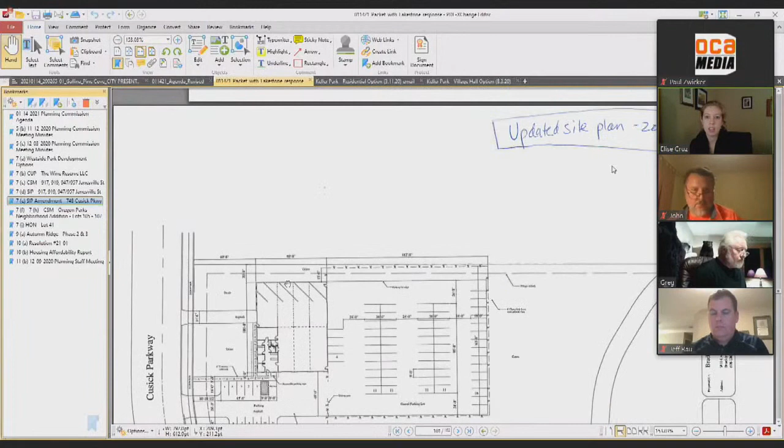But a sort of conceptual parking lot layout was included here. Jeff Greeners is architect here, so he drew this up for us, just to give a sense of how the site would flow back here and where vehicles would be parked. But pretty simple expansion. This is all within his property, no issues with setbacks or concerns from my end. And yeah, it fits in there, and he's done a lot of things that we've asked, nice growing business.

So they recommend approval. So do we have a motion to approve the revised site layout? Move to approve, Molzahn. Thank you, Bano. Bano second. Any discussion? All in favor say aye. Aye. Aye. Aye. Opposed, motion carries.

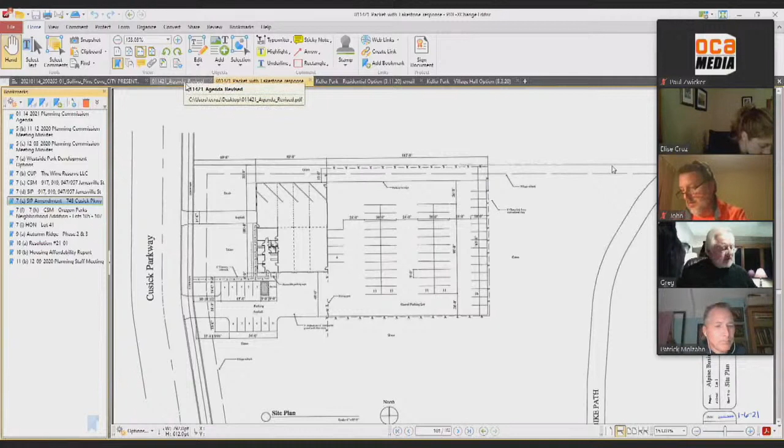Okay. Move on to item 7F. This is discussion, possible recommendation to village board, 0 lot line certified survey map for lot 105 Ithaca Court.

We'll take each one of these individually, obviously. I just prepared one memo for F through H, just for brevity. I think didn't they come before us and mention that they're going to do this Oregon Parks anyway, didn't they? Didn't we talk about this before? Maybe not. We have done some other 0 lot line CSMs just on the other side of Ithaca Court by the same contractor. Phillips Contracting is doing kind of most of the ones at Ithaca Court, and then a different contractor is doing the ones on Odyssey Court just across the way.

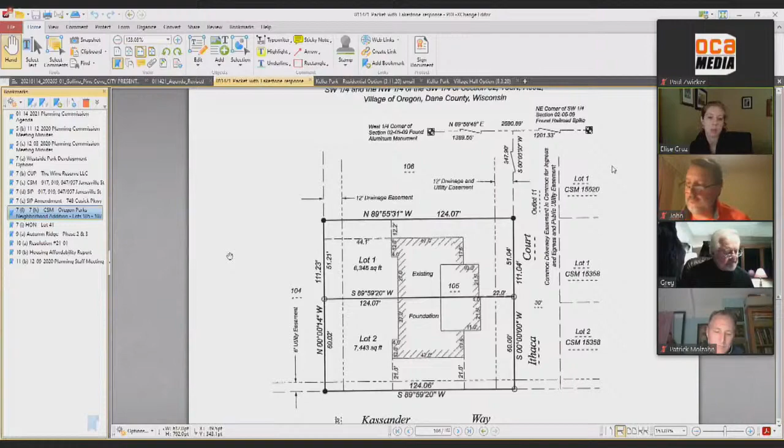But this is 3 different duplexes, and just our standard 0 lot line duplexes meets all of our requirements. Village engineers signed off on all of these as well. Okay, so first one, item F. So we need a motion recommending village board approval of the 0 lot line certified survey map for lot 105 Ithaca Court.

So moved, Bino. Second, Mahr. Any discussion? All in favor say aye. Opposed? That motion carries.

Jeannie, I don't hear a female voice in these approvals, these yeses and ayes. It must be using my deep voice. Oh, okay, I got it.

Okay, I'm just checking. Okay, item G, the same thing. Recommendation of village board approval of a zero lot line certified survey map for lot 106 Ithaca Court.

Your motion? So moved, Bino. Second, Mahr. Any discussion? All in favor say aye. Opposed? Motion carries. And item 7H, discussion, possible recommendation to village board, zero lot line certified survey map, lot 107 Ithaca Court.

Motion to approve. So moved, Mahr. Second by Schnelly. Any discussion? All in favor say aye. Anybody opposed? Motion carries. Thank you. Okay.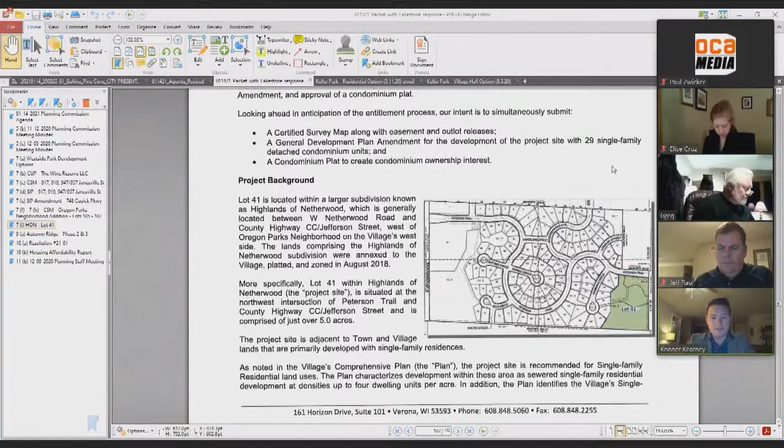Lot 41's updates are mainly driven by changes in stormwater design for the Highlands of Netherwood development. By acquiring the Tarkington parcel, we were able to modify the retention basin in the southeast portion of the development, which allowed for conveyance of stormwater from Lot 41 to this basin and removal of the previous stormwater outlet on Lot 41. In doing so, we were able to increase the unit count on Lot 41 as shown in the concept plan. As for the multifamily project, the intent is to provide a market-appropriate product to the community and also a nice transition from County Highway CC to the rest of the single family homes in Highlands of Netherwood.

So what you see here tonight is a combination of 11 10-unit buildings that make up the site in a relatively low density manner. The concept plan does impact a portion of the Highlands of Netherwood plat. Thus, the approvals would include a replat process as well. So the main goal for this evening is a high-level overview and to receive constructive feedback from the Plan Commission to inform our design moving forward.

So with that, and from direction from staff, we can open it up to questions or comments as we have our full team here, so hopefully we can answer to the best of our abilities. Thank you for the review and feedback.

Elise, do you have any more comments about it? Not at this time. I believe for approvals this would be a revision to the SIP coming up later this winter or spring. Well, it does help with the remainder of the development. You said you revised your stormwater control, which helps.

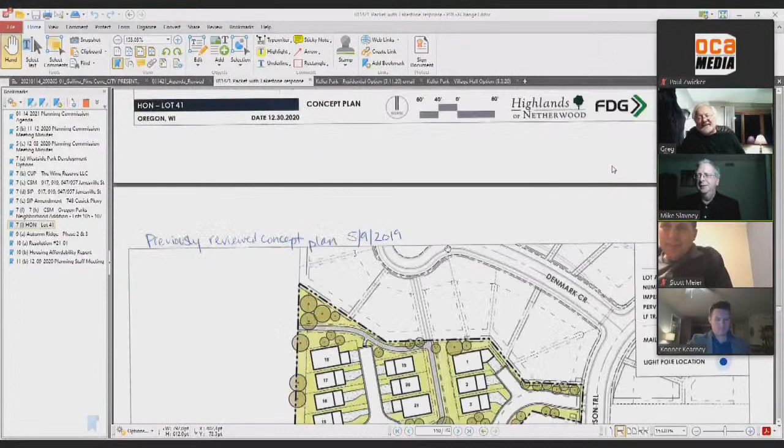All right. Anybody else? Slavney here. Jessica, can you tell us what happened to the bike path connection to the west? Aside from it's gone? Yeah. I had the same question. Yeah.

I believe we have that coming up and connecting through a lot there, connecting to the sidewalk and then coming over and around. And then, Jessica, correct me if I'm wrong, but I believe that was because of grade considerations.

Jessica, you're muted. We can't hear you. I keep on hitting mute because I don't know what my dog's going to do. I hope he just continues to lay there and be good, but usually at this time of night, he wants to go outside.

So I guess that was one of the points of discussion that I was hoping that somebody would bring up this evening. Because in moving forward, when we looked at grade, it made more sense to make that connection in between those two lots there. But if the other location is preferred, that's something that we would need to look at and kind of go back to the engineering drawing board on. But in terms of maintaining accessibility, this path was the better route.

So by the two lots, do you mean at the end of Denmark Court or Denmark Circle cul-de-sac? Denmark Circle. Yep, exactly. And so that path to the west then connects to would have a better point of connectivity too through that cul-de-sac in the main north-south. So you wouldn't have to go all the way through lot 41 to get to the west. You would be able to cut over sooner.

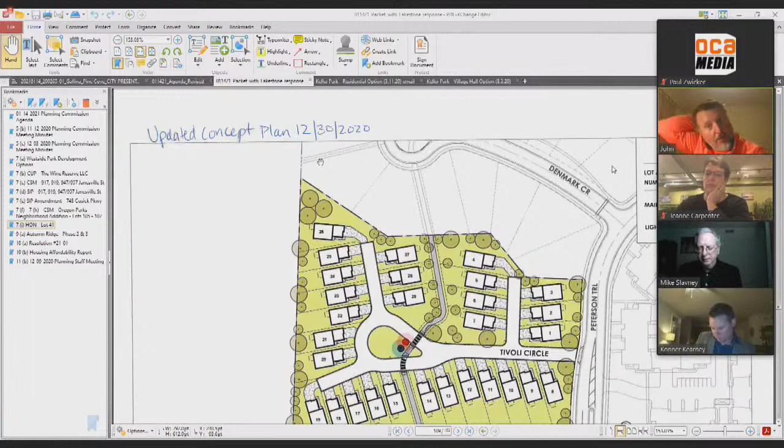I got a question for Jeff. Jeff, I'm looking at this and I'm seeing a light pole location. Village-wise, is that enough for our typical street layout? Do they need more than one? And actually, I'm not sure. I did provide some comments to Elise earlier, and I think she forwarded those to the applicants.

Yeah, some of my comments were snow storage, turning radius, and light and the bike path. So I think it's kind of funny we've been covering most of it tonight here. These are private roads, and so my suggestion had been that added lighting would be recommended. It seems to always be a request, and then people who buy these find out how dark it is and then come back to us and we say, well, it's private, you guys have to figure out how to do it yourself. So we recommended more lighting.

All right. I don't hear any real objection to the development, correct?

This is really similar to what had gone through, was that 2 years ago, Jessica? Probably, I think it was 2019. Yeah, I think it was 2019. Back when we went through the process, freedoms, and we met in person and all that cool stuff. Remember those days? Yeah, when we could go to restaurants and have a life.

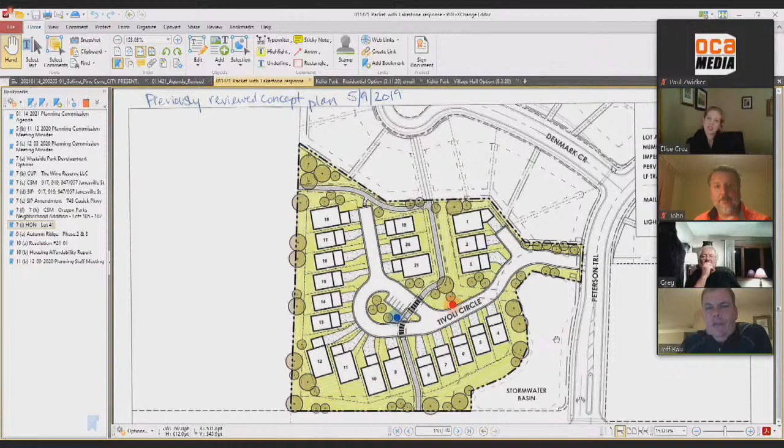Exactly. But this is a very similar layout, and that went through a lot of scrutiny with the fire chief and everything else. There's definitely more density. There was some concern over some of the lot lines, but I think by and large they've stayed fairly true.

Just a little different layout with them being able to push that stormwater pond over. We're in support — anytime we can reduce the number of stormwater ponds, that's one fewer pond we have to take care of, or if it's private, in this situation, it's something the village would have to take over. So we're in support of that, as long as it works and meets all the release and retention requirements.

Okay, Greg, I got one question for the applicants. Overall, I think it's a much better plan. I like it. I'm noticing that the guest parking has been removed. Was there a particular reason why that was removed?

I think, go ahead, Konner. Okay, sorry Jess, let me know if I missed anything, but we did have the guest parking originally in this plan. In some of the early discussions with staff, the issue of snow storage, as Jeff pointed out, was brought up. So we chose to eliminate that and make that island slightly larger to accommodate for the snow storage. What we were also able to do in increasing the lot sizes generally throughout the project was increase some of the driveway lengths, so in addition to the garages each unit has, there's room for parking for 2 vehicles within those driveways. We found that in similar developments, tenants' guests park in the actual driveways of the units.

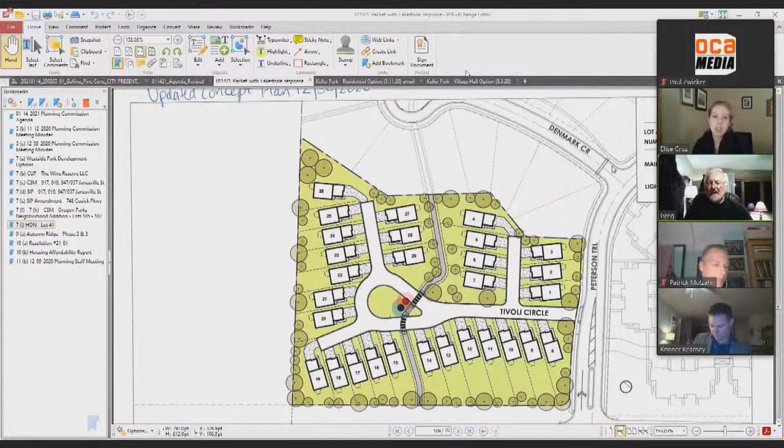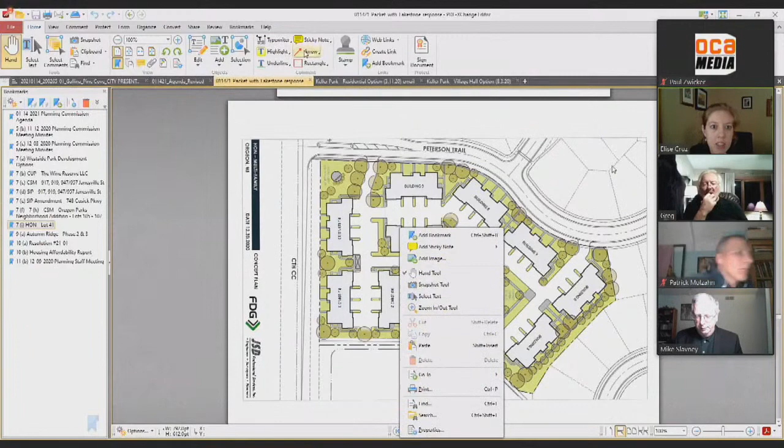We do have the concept for the Tarkenton parcel, so if you want, I can flip to that page. If you'd like to, sure. Let me zoom out a little bit and rotate this page so it's easier to orient ourselves. There we go. So Konner, you want to walk us through this one as well?

Sure, yeah, absolutely. So 11 overall buildings here, 10 units each. The intent was to provide some transition into the single family lots from CC and really create a community-scaled approach to multifamily housing. What we wanted to avoid was the medium or higher density product and any of the 3-story stuff here — we didn't feel it would be an appropriate entrance to the development. We thought this was a more scaled and appropriate approach to creating an alternative product type within the development.

If Jess wanted to walk through the details of the site layout, she could. I think it's relatively self-explanatory, but overall there are 2 access points, one at the south end of the site and one at the north end. We're still looking at the phasing of this potential development, whether we do all buildings at once, and which entrance gets constructed first. But the general intent of the layout is flexibility in design, and really hitting what we believe is a needed product type in the market.

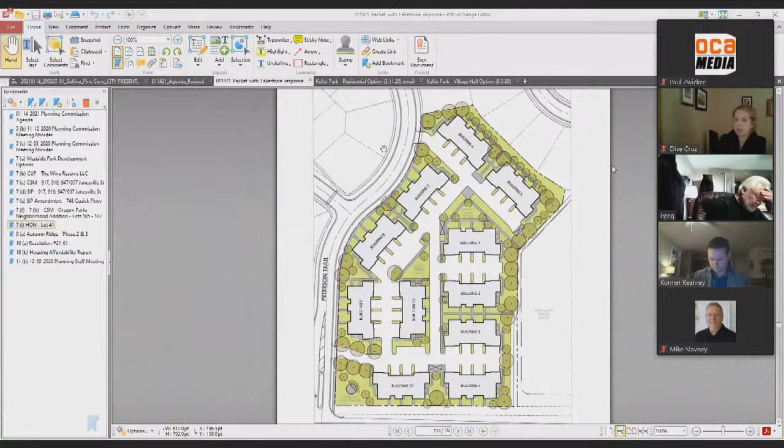I'll highlight a couple of things that worked out really well between the stormwater and the multi-use paths. This development is also centered around the idea of a central sidewalk connectivity. What we did is create a sidewalk that connects to the future multi-use path that will be along County Highway CC, and that will connect up through the development.

You'll see sidewalk connections that go to the east, where the new larger regional stormwater facility will be located. There's also a multi-use path that was originally on the far east side of the Highlands of Netherwood subdivision, located on the outside of that subdivision, almost hidden and not connected to the interior pathway system. When we were able to regrade and reconfigure our regional stormwater basin in that location, we were able to move it to the west side and have it connect down to County Highway CC, and then connect up on the far east side, between the stormwater pond and this development.

So you have a couple of points of connectivity that will get you into the larger, more regional trail system, but that also connects the neighborhood trails and pathways, and the new park on the north side of the development. From a connectivity standpoint, the stormwater design and how we organized buildings on this site worked out really well, happening both at the same time.

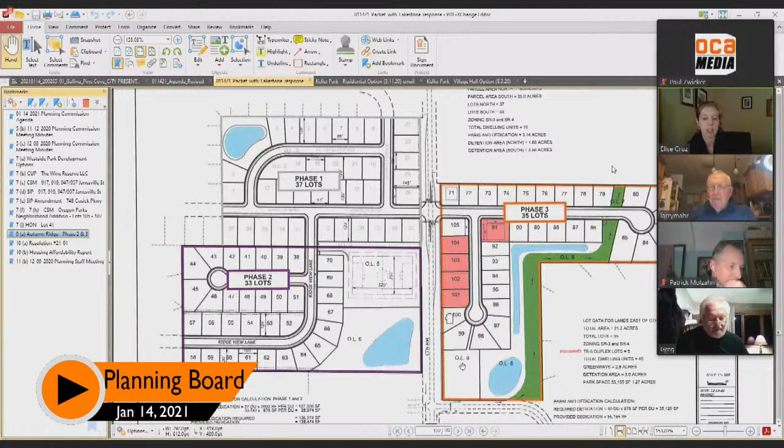These are obviously still in a conceptual stage, and we've submitted some comments to them about making sure these parks are visible and accessible. The developer is committed to working with us to make sure there are sidewalks, signage, and everything. These will likely move around a little bit, but this is the plan that was submitted to CARPC earlier this week for the urban service area amendment. I just wanted to make sure the Planning Commission saw this slightly revised layout. Okay good, anybody have questions?

Again, I mentioned to you, very nice that you brought to their attention they could add some more lots, so it was good. Maybe they'll throw in a playground for us. We'll see. I think I just made them some money, so. Yep.

Okay, they're moving on then to item 10, new business. Discussion, possible adoption of resolution 21-01 to recommend proceeding with the urban service area amendment process for Autumn Ridge phases 2 and 3.

Just noticing a typo here. That's the one you're telling me about, Mike. Yep. So in tandem with the plan that we just looked at for the CARPC urban service area amendment, we do need a formal resolution by the Planning Commission, and we'll have one at the village board on their meeting on Monday night.

So this resolution signs on for the urban service area amendment. The Planning Commission agrees that they'd like to proceed with the amendment. All right, so it is a recommend. Well, this resolution is a resolution approved, or a resolution made by the Plan Commission, which then will be forwarded to the village board. They will actually have a separate resolution, so this one will be signed by you, Greg. But it's adopting a resolution to formally request CARPC to consider and approve the USAA for the 40.7 acres.

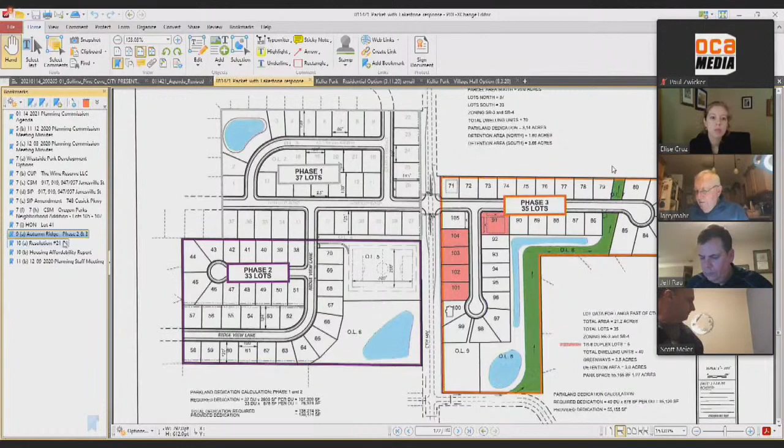Move to approve. A second? Second, by Mr. Mahr. Any discussion? All in favor say aye. Aye. Opposed? That motion carries. Thank you.

Item 10B, the 2020 Oregon Housing Affordability Report. All right, this is not as exciting as it should be. I didn't have too much time to revise from 2019, but I did update some numbers with construction, which was down, of course, a little bit over 2020, and updated numbers with regards to number of houses on the market, average price of home sales, all of that. So it looks pretty similar to the report that Vandewalle put together for us last year.

And I do think it might be worth our while if we ever have a light planning commission agenda, or maybe a special meeting, potentially with the village board. There were some really great suggestions made by Vandewalle last year about different things we can change in our zoning code, in our comp plan to encourage affordable housing or other types of housing within the village. And I think it probably deserves its own discussion. But at this point I didn't have too much time to go into those, and I think before we go through revising those, we should dig into those suggestions a little bit.

You want us to hang on to this report somehow, or? Yeah, it's on the village website. It's actually a requirement of the state now that we're over 10,000 residents, so we have to do this every year. So it's right on the homepage, housing affordability report, in case you lose it. We'll certainly put it in another packet when we do have time to discuss this later.

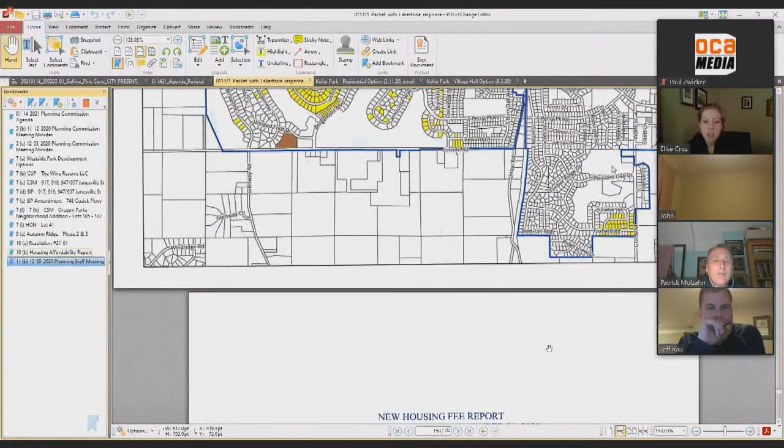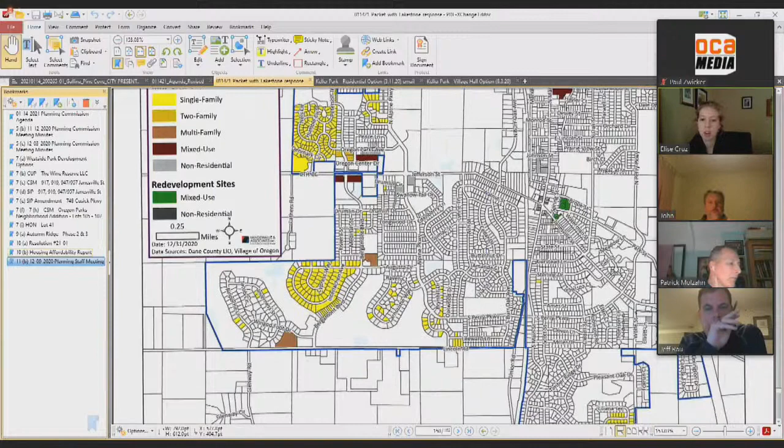Yeah, there you go, that's it. So that's a lot of the ones in yellow here. I did update a couple of these from what's been developed this year based on building permits, and then some of the Autumn Ridge lots as well. So it looks higher than it actually is. A lot of those phases haven't been released yet.

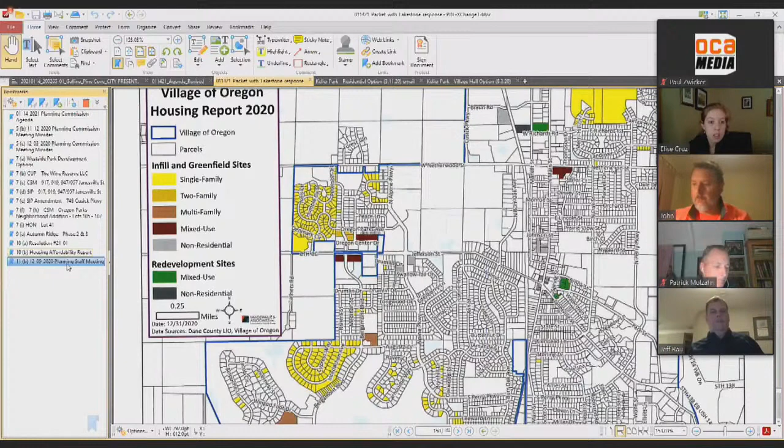Okay. Okay, staff report. Development, status of developments and projects. Let's see.

Just as far as any kind of development projects, I think things are continuing to move ahead nicely. We've met with, I'm not going to release the name, but we've met with a developer the other day, and they're wanting to bring another phase of their development in, and that's good. We see Autumn Ridge moving ahead.

But even though we're in the middle of this situation with the pandemic, we still had 45 single-family permits issued, which is not bad for us. We get between 40 and 50, that's a pretty good year for us. So we're very fortunate. We expect a bit of a lag from some stuff, but not much. We think it'll be a good year development-wise.

Future meetings. Amending parking zone, our parking requirements, street tree requirements, TIF, conceptual discussion, temporary uses. Nothing we want to talk about now, right? No, save that for another night. I think we talked about enough tonight.